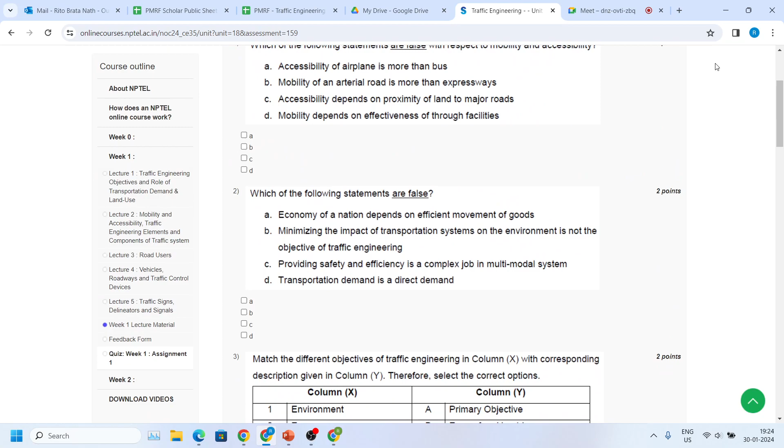Now, if someone asks you whether it is related to the structural design, that's not true. And let me check if there is something related to this. Okay, it's not there in this assignment, but I think it was there somewhere in a previous assignment, or it's in one of the options probably. Okay, so these things are fine. I think it's not that difficult to understand. Traffic control operations. Yeah, let's talk about traffic systems management next.

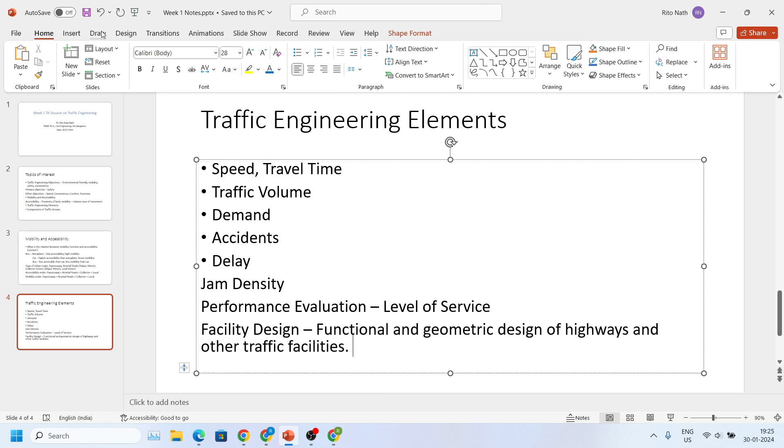So what do you mean by traffic systems management? If I ask someone, can anyone tell me? Okay, let's write down your point. To make traffic as uninterrupted as possible. Okay, that's true, but how do we do it? It's like technology is one thing. Sorry, can you repeat? Okay, great. And operation of. Okay. Operations, for example, say carpooling.

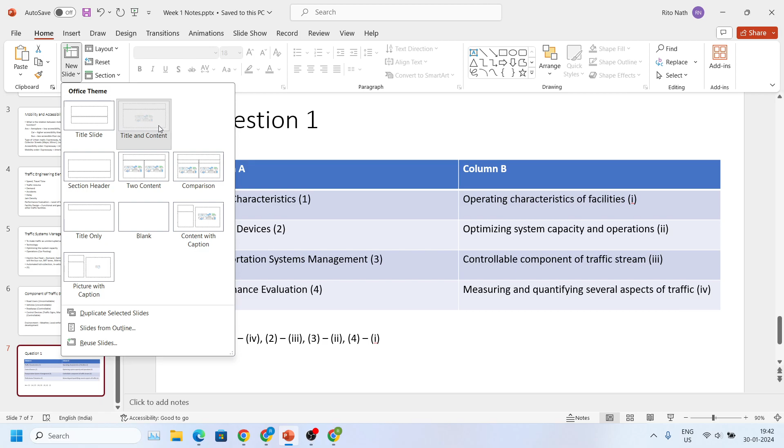Okay, so I think we didn't discuss some of the basic definitions. So let's talk about that because there is one question related to this. Okay, some basic definitions, like in few words, maybe you can explain. So this one is environment, then economy, then you have convenience and safety, and these are also the objectives that we have talked about. So what do you mean by safety? So this is the primary objective, right? So we have already discussed this here. This is okay.

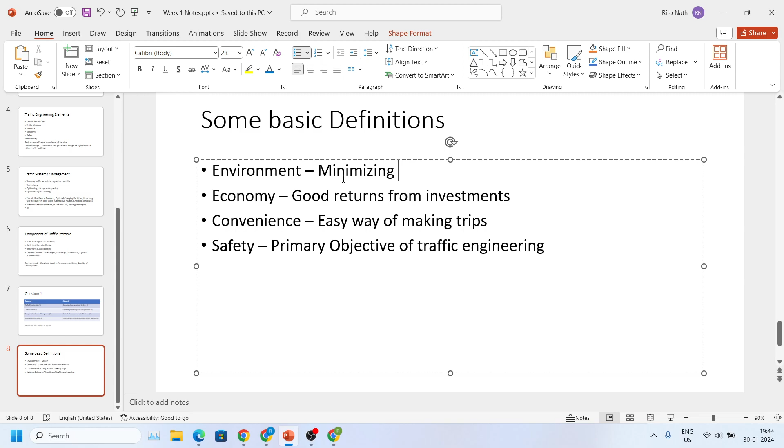Next is convenience. So what is convenience? What do you mean by this? Sorry, I couldn't hear. Yeah, yeah. Easy way of making trips. What do you mean by economy? It's very simple, right? Yeah, correct. And this we already talked about, right? So maybe you can think. Sorry. Okay. Yeah, that could be one of the objectives for environmentally friendly travel, but that's not always possible though. Yeah, that's true. Yeah.

Okay. So sorry, your voice got cut. Can you repeat what you said at the end? Okay, yeah. So, yeah, go ahead. Yeah.

Yeah, correct. So it's not like it's... yeah. So here I think the focus is only on the road user point of view. Suppose you want to travel, say, 2 kilometers, you wouldn't want to be paying, say, 100 rupees for that. Maybe there are some cheaper alternatives where you can take 20 rupee auto rickshaws and so on.

But economy, in a broader sense, you can think of it as if you are a planner, traffic engineer, or a system planner, whatever you think of, then obviously you have to design your system in such a way that whatever you invest, you should get returns from it over a period of time. So it works kind of both ways, but here the emphasis is on road users.

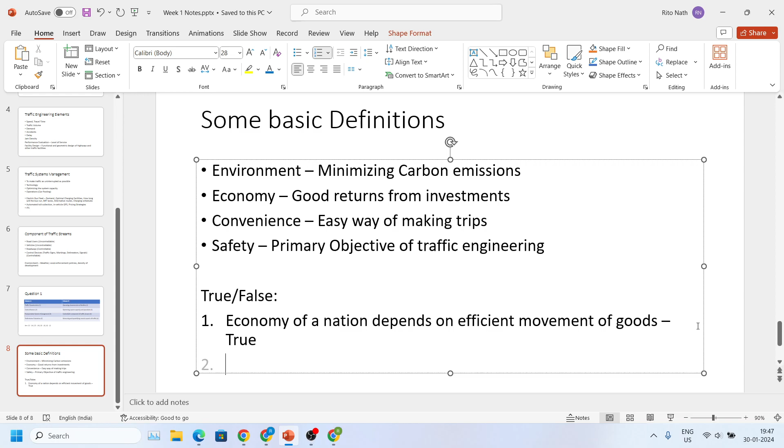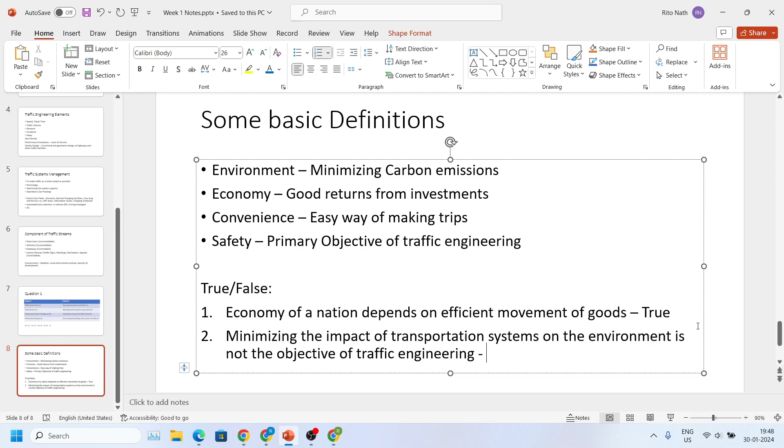Next, let's talk about: minimizing the impact of transportation systems on the environment is not the objective of traffic engineering. Do you guys think this is true? Yeah, these questions you can answer from your basic sense as well, so that's fine.

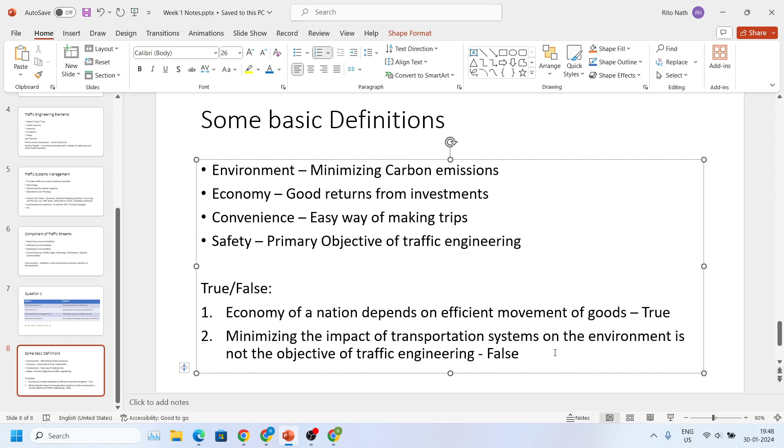And let's talk about something that is relevant. Okay, let's solve some more of this. Can someone define what is level of service? So you know, right? There are 6 levels of service by which you can classify. Yeah. So it's generally the quality and performance of a facility. By facility here, I mean the road infrastructure. So that's kind of simple.

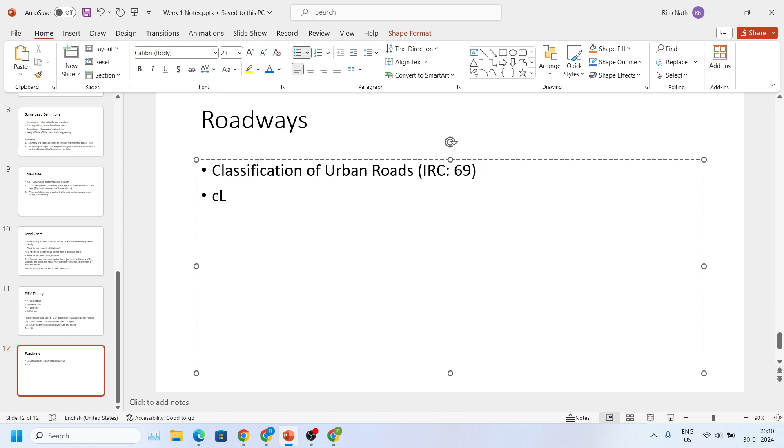So classification of urban roads that we have already discussed today, that is, I think, from IRC 69. I don't remember the latest version, so you have to check which year that comes up. Then there is classification of rural roads that we haven't discussed today. So can anyone remind me what are these? I think these are national highways, state highways, major district roads, then village roads, and this is from IRC 73 if I'm not wrong. Yeah, correct.

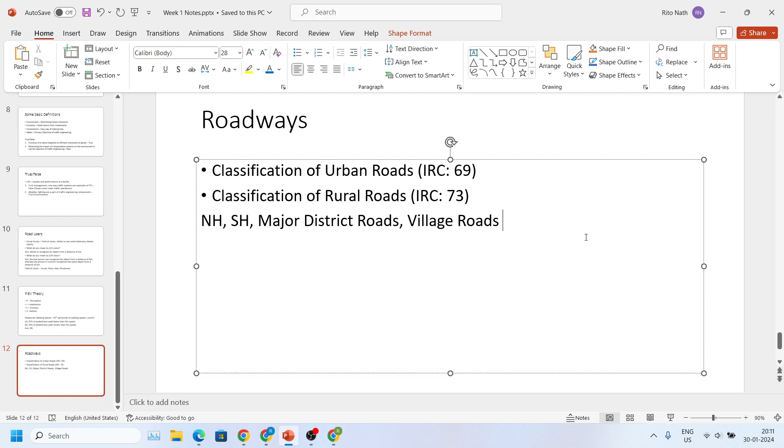So these are described. Then there is traffic control devices. Road delineators are kind of to guide the traffic where there are bends and so on. In night times those are useful, so we won't be discussing that in detail. Let's get into the traffic control devices. And with that, maybe I'll stop the discussion on this and go on to the assignment problem solving. So one, this is road markings. The critical thing here that you might have to remember is this is relevant to the IRC 35 code.

And the other stuff is this color. So it's white versus yellow. Then there are blue and green markers as well. So can anyone tell me what these are used for in road markings? White, blue, green, yellow, these things. Okay, okay. Oh, those are the boards you're talking about. It's something different. This is road markings. These are markings on the road. It's not the boards.

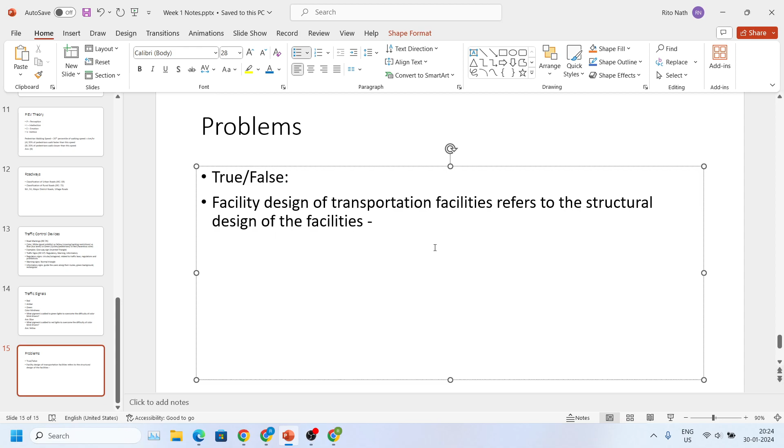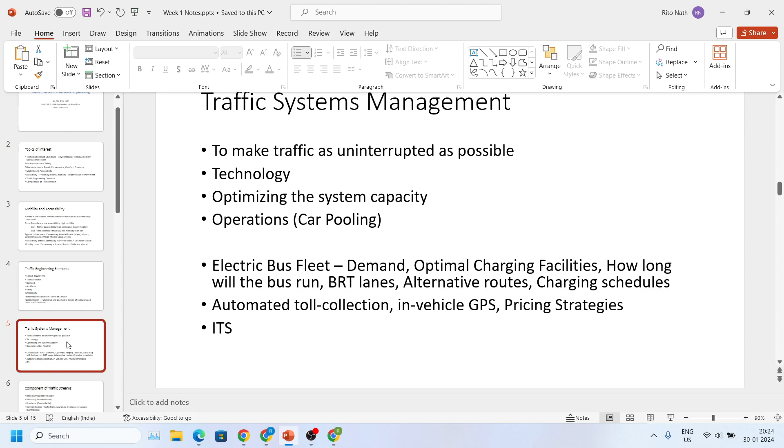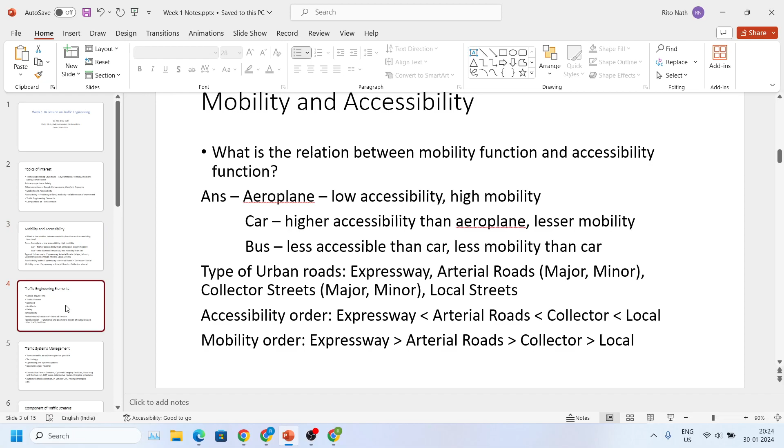Then let's talk about this one. Facility design of transportation facilities refers to the structural design of the facilities. Is it true or false? Yeah, and there was another point, something related to functional. Let me check quickly. It's a functional and geometric design of highways and other facilities. So this will be false.

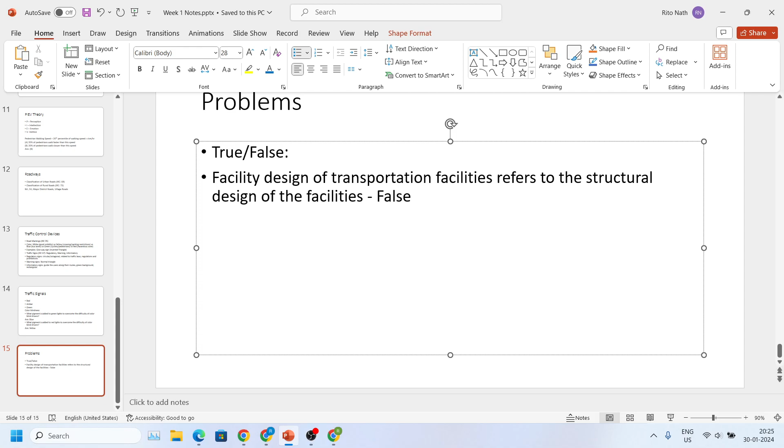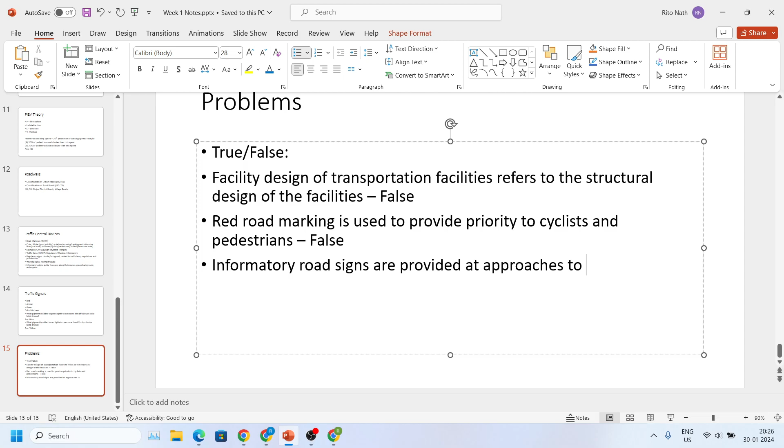And then this is also discussed. Okay, what would be the answer to this? And the correct one? Okay, yeah, that's true. Okay, so let's see. What would be the answer to this? Is it true? What about others? Is it informatory or regulatory or any other wording? Which one? Okay, so you are saying it's false, right? Correct.

Okay, so let's say this is false. Now let me write this. Yeah, it's false. That's correct. What would be the answer? Let me check. I think it was there in the class. Quickly I'll tell.

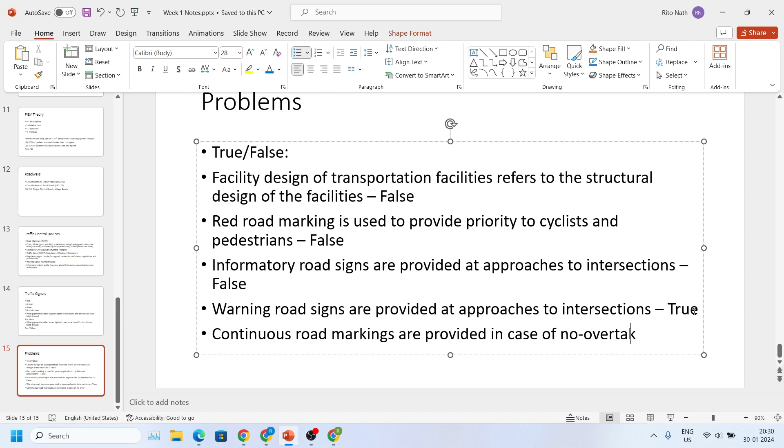Okay, so we have still half an hour, let's see if we can solve some more problems. Continuous road markings are provided in case of no overtaking situation. Yeah, this is true. Correct. Okay, this is fine. Let's solve another.

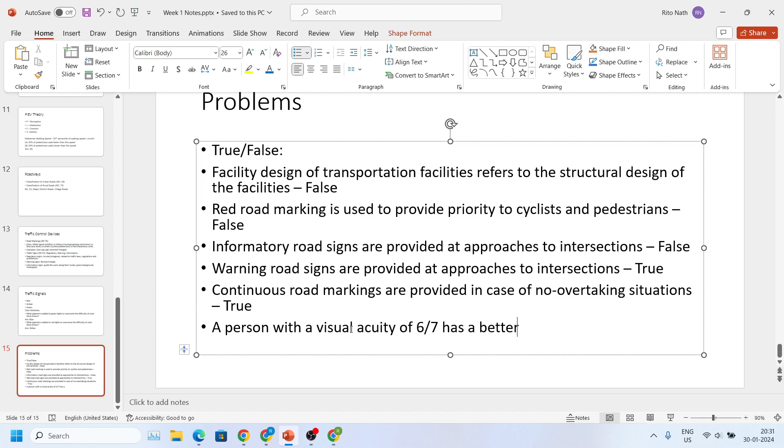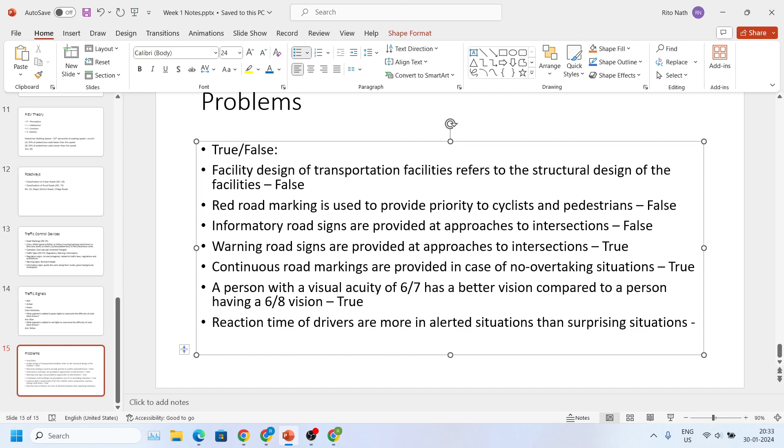Is it true or false? Yeah, correct. Yeah, go ahead. Hmm. Yes, correct. Correct. Yeah, that's okay. Next, say reaction time of... what would be the answer to this? Yeah, yeah, it's very simple, I think.

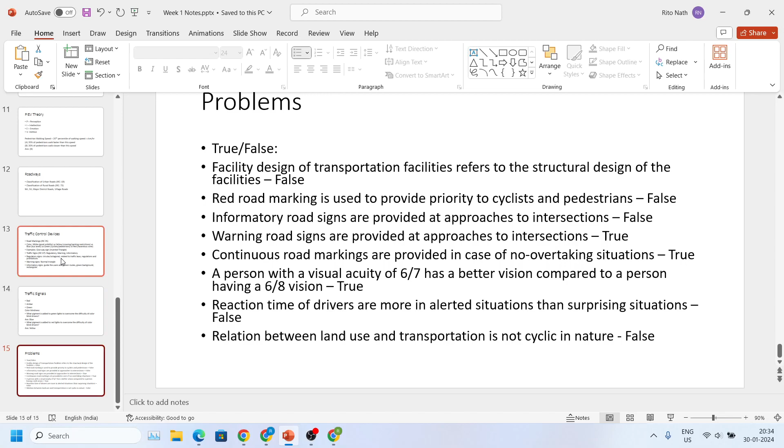Yeah, any answers to this? Yeah, I think it was discussed at the very beginning. One thing influences the other, so it's kind of cyclic in nature, so this should be false. Okay, so I think this discussion is fine for the assignment. So since I have some time, maybe I'll just create some more questions and we can answer.

Okay, let me see which are the things that are relevant. Okay, let's

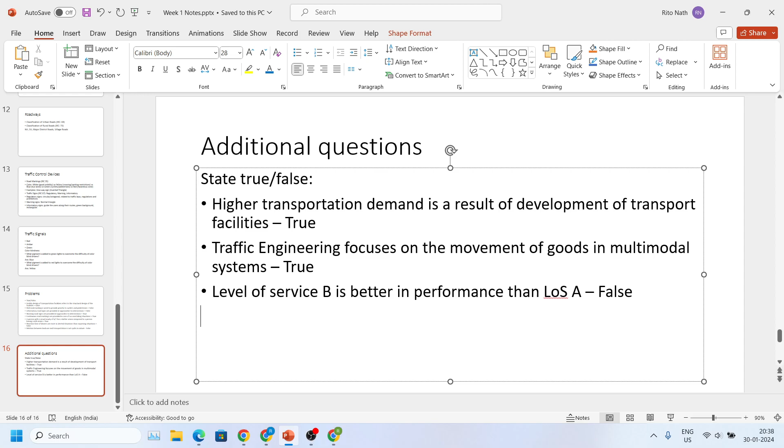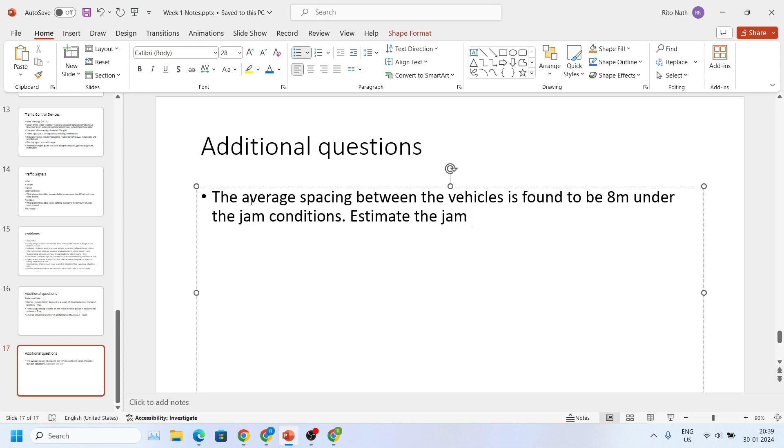Okay, let's now take a simple problem. I think it was their assignment. Yeah. Okay, so let's take this: the average spacing between the vehicles is found to be 8 meters under the jam condition. Estimate the jam density in vehicles per kilometer.

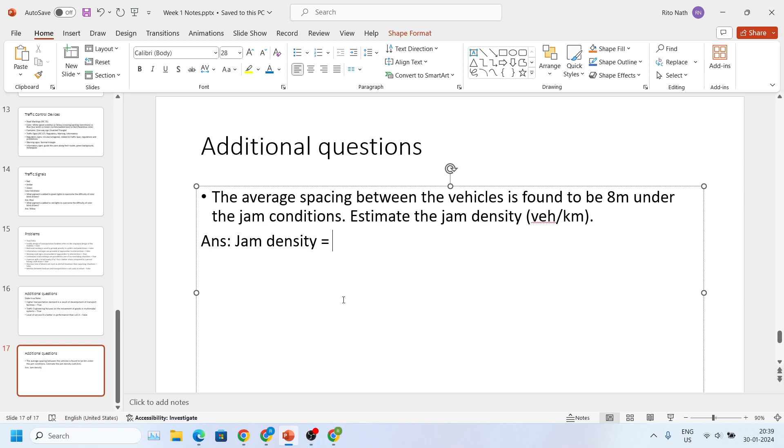Okay, so how would you approach this problem? What would be the answer to this? Okay, so 0.125. So you are saying 1 by 8. Okay, but is it vehicles per kilometer? So this is vehicles per meter, right? Because this is 8 meters. Yeah, correct. So it's 1000 by 8. So this will be vehicles per kilometer. So that will be, I think, 62.5, is it? No, 125, sorry.

Okay, this is simple. I think this was there in one of the assignment 0 questions probably. Then I think there is something relevant. Okay, space mean speed and time mean speed. These things will come up later, I think, anyway. But yeah, I think we can discuss them later when it comes up in the course. Let me see if there is anything else to be discussed. Okay, I think I've covered a lot of things already from this assignment.

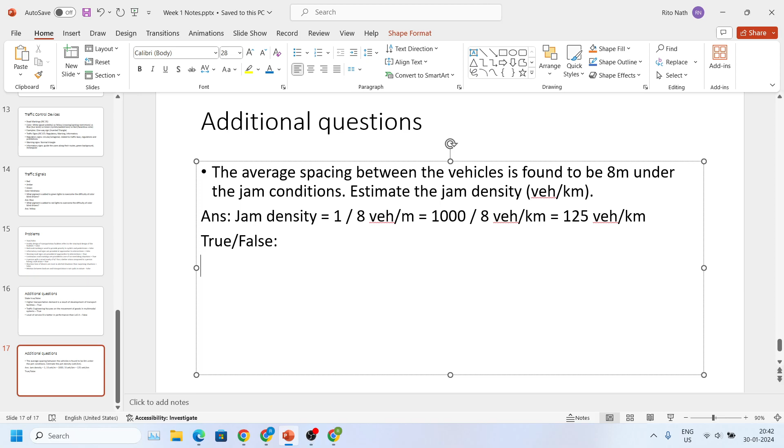Okay, so let's see. Let's move on to another. Okay.

What would be the answers to this? Okay. Yeah. Yeah, what would be the answer? Yeah. And this one? Yeah, correct. Okay, this is easy. Okay, let's take one more kind of a problem.

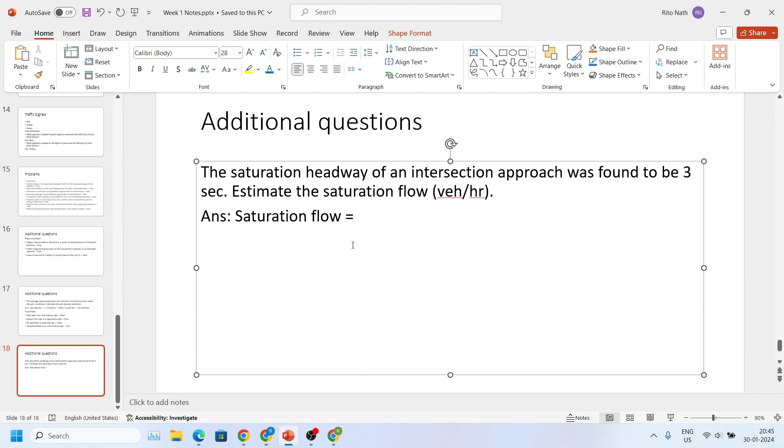Okay, it's similar to before. It's 1 by 3, that's vehicles per second. Now for vehicles per hour, you have to multiply it by 3600, and that gives you the answer. Yeah, these things will come up again later as well. Okay, so let me check.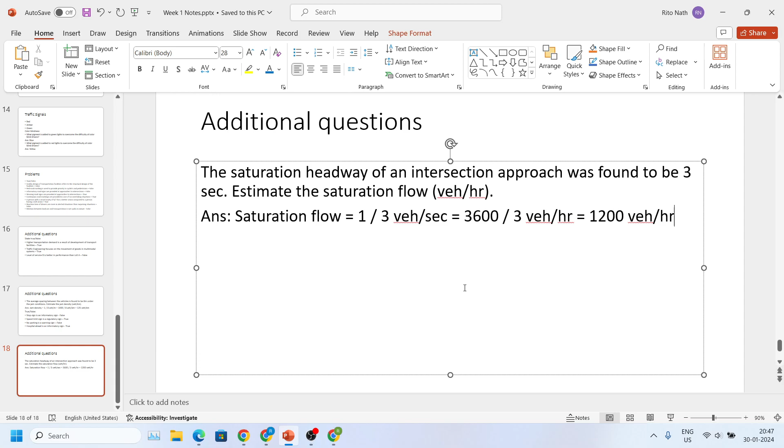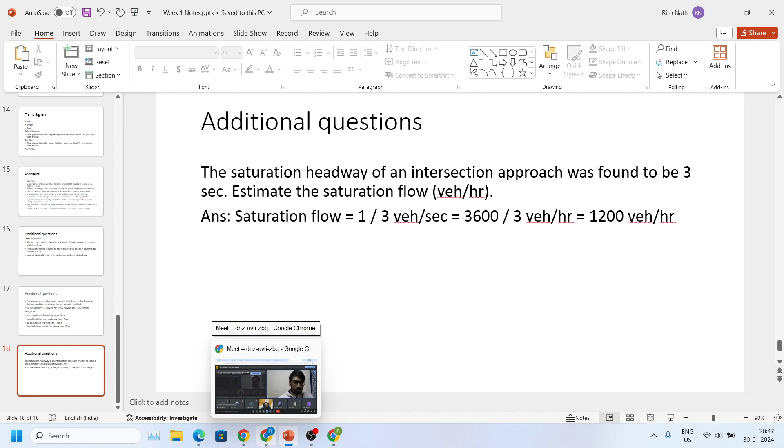That I'm not sure of, because these NPTEL lectures are structured in such a way that the videos are already made, the lectures that have been posted every week. So even I have not seen the upcoming lectures. There may be or maybe not. In terms of TA sessions, I cannot ask any guest lecturer or guest expert to come and give a talk, because it's purely up to me to deliver and mainly to focus on solving assignments. So I'm not sure if you'll get first-hand access to a traffic engineer as such, but I think there will be maybe two live sessions with the faculty itself.

There, I think you can ask him whether it will be possible to arrange for such sessions, or he might say something during those live sessions. And yeah, that's all that I know right now. And if you have any doubts or suggestions, you can always post it on the discussion forum in this course. There, the other faculties or the main TAs of the course, the ones who will check the assignments, will probably notice those messages and reply to those. Yeah.